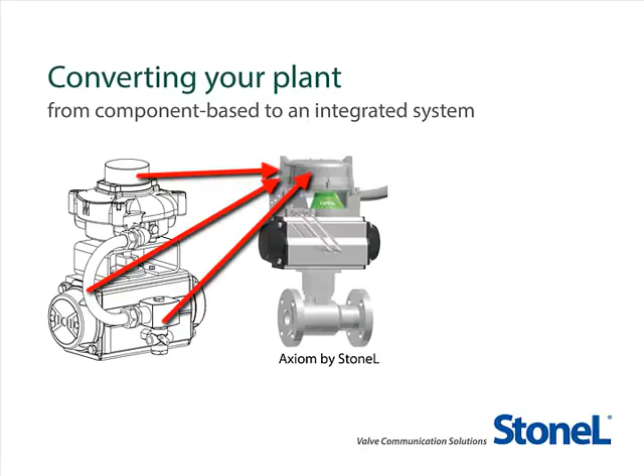By converting your plant's valve monitoring and control accessories from a component-based system to the integrated system of the StoneL Axiom platform, you will improve reliability, increase uptime, enhance safety, and reduce total lifecycle costs in your process environment.

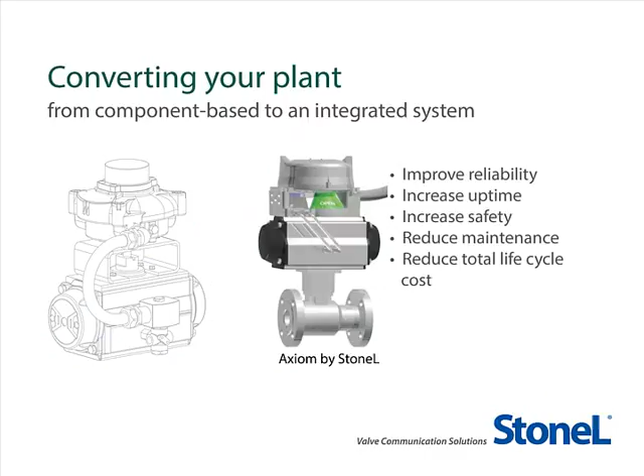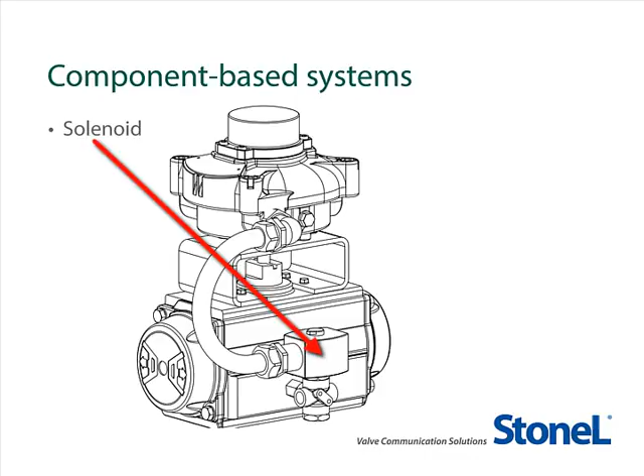During this presentation, we will review the individual parts of a component-based system you may already have in your plant, including solenoids, wiring conduit, and valve monitors with mounting.

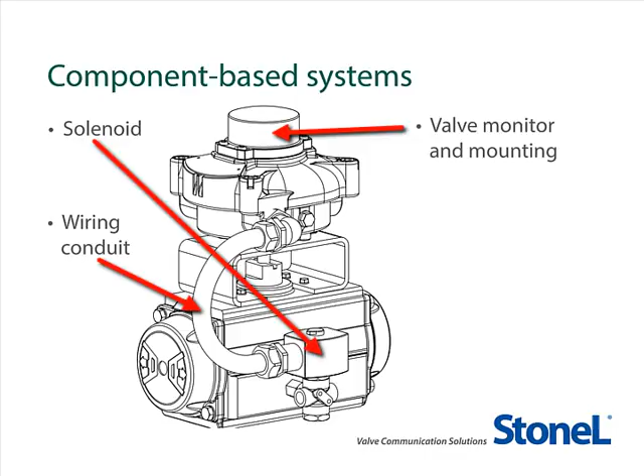We'll compare the cost of a component-based system like this one to the Axiom from StoneL. We'll review the extraordinary capabilities of the Axiom platform and the numerous benefits of converting your plant.

Let's get started. Many manufacturing plants today have fairly complicated component-based valve monitoring and control systems that may include several of the following solenoid variations.

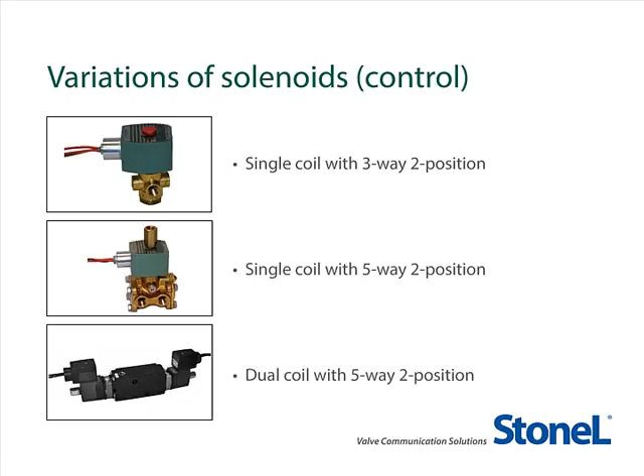Single coil with three-way two-position for single-acting spring return actuators in fail-safe applications, single coil with five-way two-position for double-acting actuators, or dual coil with five-way two-position for double-acting actuators designed for fail-in-last position.

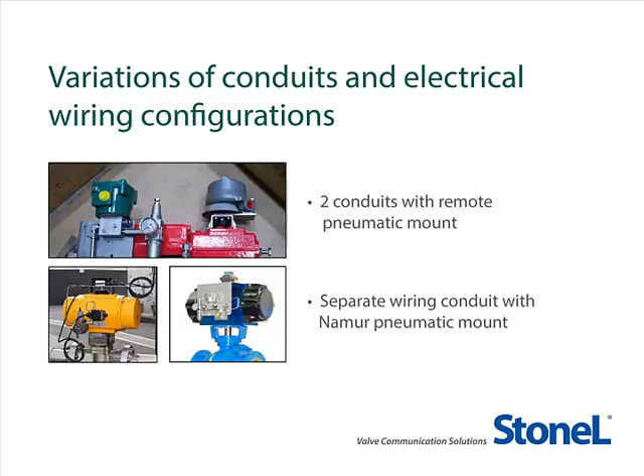You may have an array of conduits and electrical wiring configurations connecting various components on the automated valve assemblies in your plant. You may have variations in switching feedback, including silver or gold mechanical, high or low power reed switches, or different types of solid-state sensors.

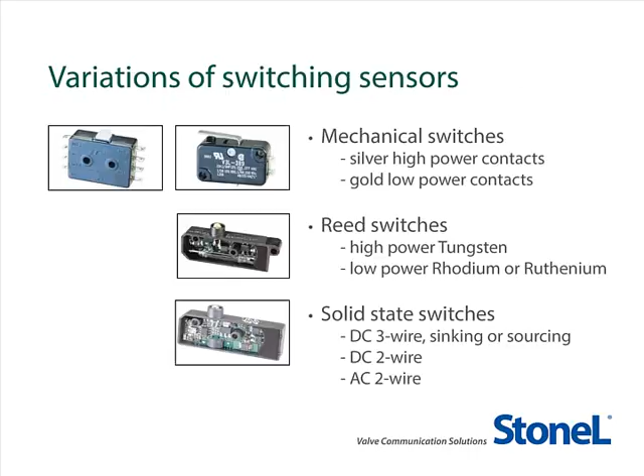Though your component-based system may have operated acceptably, it was more complex to specify and order and much more difficult to install than a single, integrated system using the Axiom.

The Axiom is a much simpler, convenient, space-efficient, and reliable solution for your hazardous process areas and will continue to outperform a component-based system for many years to come.

With an impressive array of capabilities built in, the Axiom offers exceptional reliability and advanced performance, including an integral pneumatic valve with a universal voltage, burnout-proof solenoid, an external pneumatic valve override, a standard five-way two-position valve configurable for spring return or double acting, and a built-in rebreather function.

It also features a solid-state sensor module with push-button set points, fully sealed electronic components, a high-accuracy position sensor system, and a non-moving part magnetic drive system.

The Axiom's pneumatic control consists of a low-power pilot that drives the main high-flow spool valve. It is designed for long life, over 1 million cycles, and has high tolerance to airline contaminants.

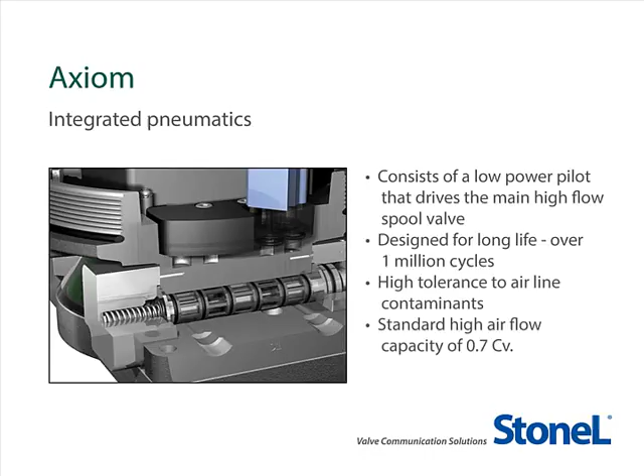It is offered as standard with a 0.7 CV airflow capacity, which is capable of operating most actuators in less than 2 seconds. It is also available with an option of 1.2 CV for larger actuators.

The Axiom also features a five-way two-position spring return configuration as standard, so the same unit is capable of operating both double-acting and spring return actuators.

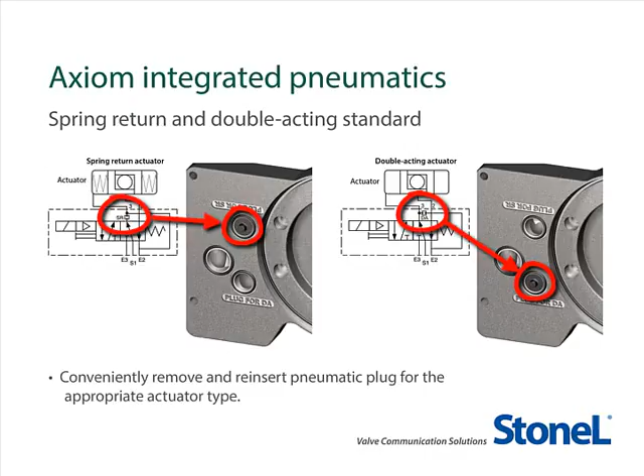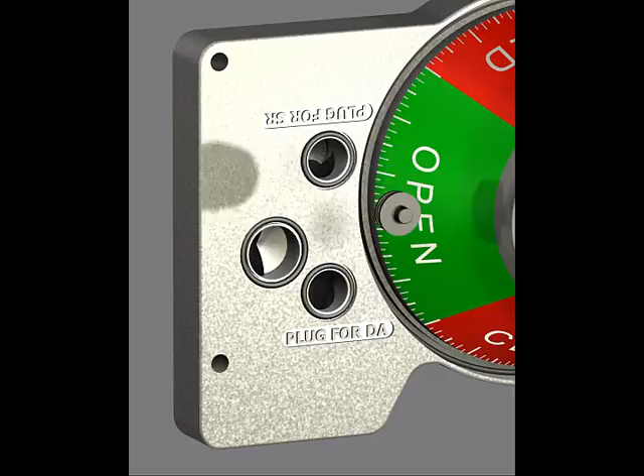Adjusting the Axiom for spring return and double-acting operation is quick and easy. Simply insert the plug sandwiched between the manifold and housing in the DA port for double-acting or SR port for spring return. Reassemble the unit to the manifold and you're ready to operate.

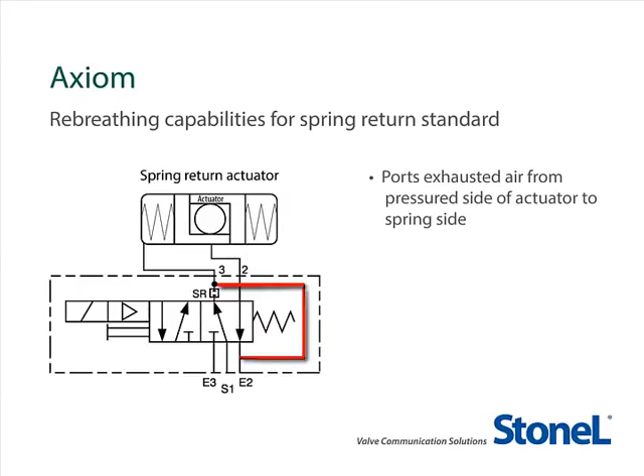With the Axiom set for spring return and both sides of the actuator plumbed, it operates with a rebreather capability. Exhausted air from the pressure side of the actuator will be drawn into the spring side, preventing ingestion of contaminants from the outside environment, which could potentially corrode the springs or internal components of the actuator.

The Axiom utilizes a magnetic drive system which monitors exact valve position and is tolerant of lateral and vertical shaft movements that can result from worn actuators in high-cycle applications. No cams, shafts, or other mechanical apparatus are required that are prone to wear and binding.

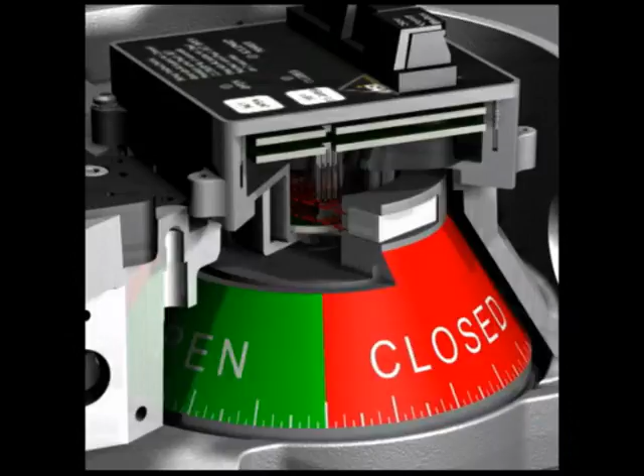As the visual indicator turns, the flux lines rotate with the MagRes sensor measuring the angle of rotation. The result is trouble-free performance throughout the application lifetime.

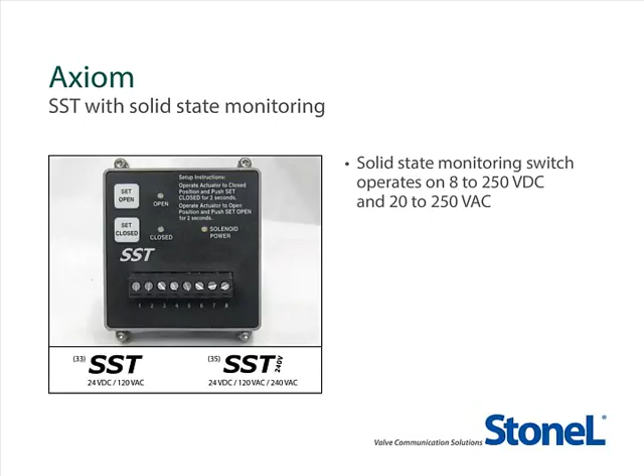The Axiom with SST switches is capable of operating from 20 to 250 volts AC and 8 to 250 volts DC monitoring circuits. The solenoid input on the same module is also capable of operating from 20 to 60 volts DC and from 20 to 250 volts AC.

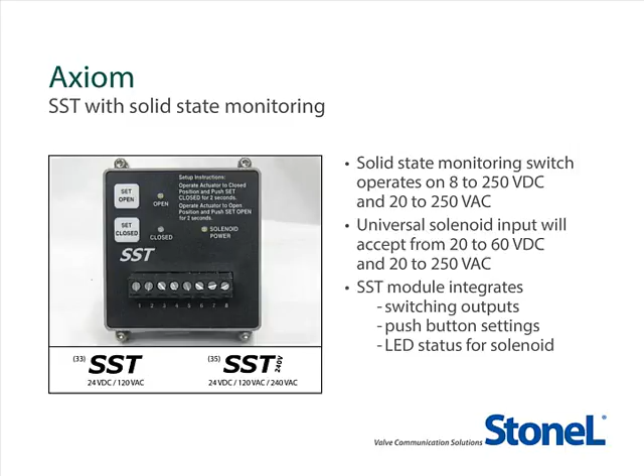And the SST module integrates these solid-state switches and solenoid voltage conditioning, all with LED indication, open and closed push-button settings, and a high-accuracy magnetic sensor system.

You can have spring return or double-acting actuators. You can have AC or DC monitoring applications. You can have AC or DC outputs driving the solenoid valve, and you can have hazardous corrosive environments, all compatible with the same AX model.

By stocking just one model in your plant, you will be able to satisfy a number of different applications.

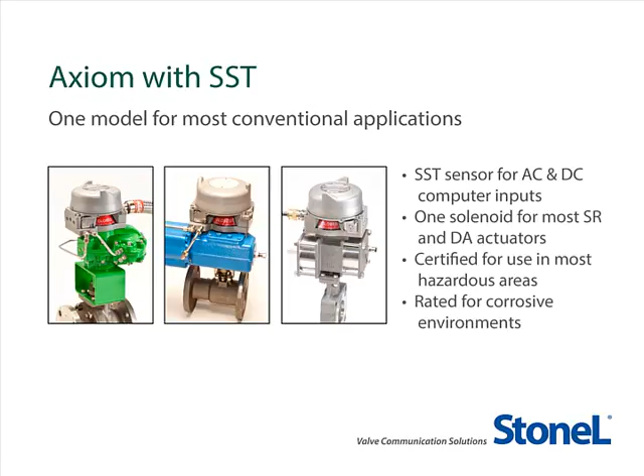The Axiom Sensing and Communication Module, which we call the C module for continuous sensing, is available for either computer input switching or can be selected with Namur sensors for use with repeater barriers in intrinsically safe applications.

A wide variety of communication protocols may also be selected, including AS interface, DeviceNet, Foundation Field Bus, Modbus, HART, and more. With each of the protocols, you may select the solenoid to minimize power requirements and make sure your field network operates optimally.

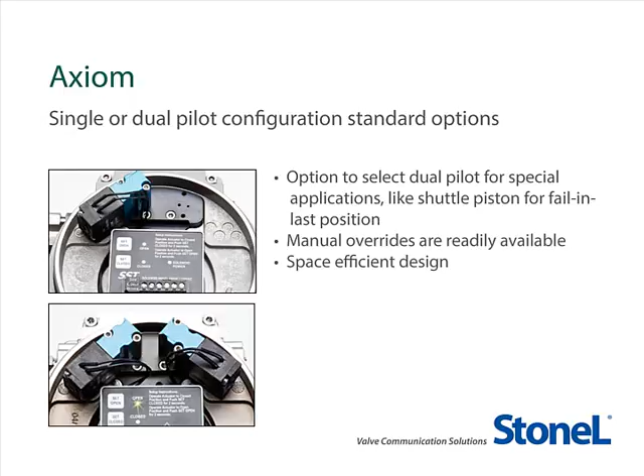With the Axiom, you have the option to select dual pilots for special applications, such as shuttle piston for fail in last position. The manual override on the cap of the pilot valve is standard on all units, and you may specify either an external momentary or a latching override. Since both pilots are neatly tucked into the existing enclosure without modification, there is no change in the already space-efficient design.

Installation and maintenance of the Axiom is quick and easy. The AX encloses all electrical components in a hazardous-rated enclosure with less than 5 inches, 130 millimeters of clearance required above the top of the actuator. Additional clearance for cover removal is less than 2 inches, or 50 millimeters, because there is no shaft to lift over. The automated valve spacing envelope is minimized without compromising performance or maintainability.

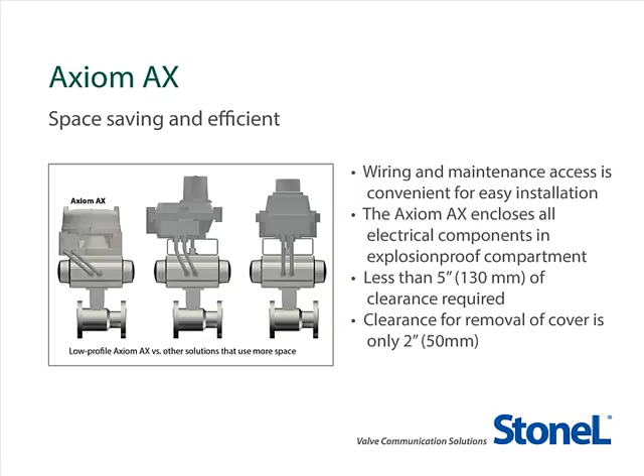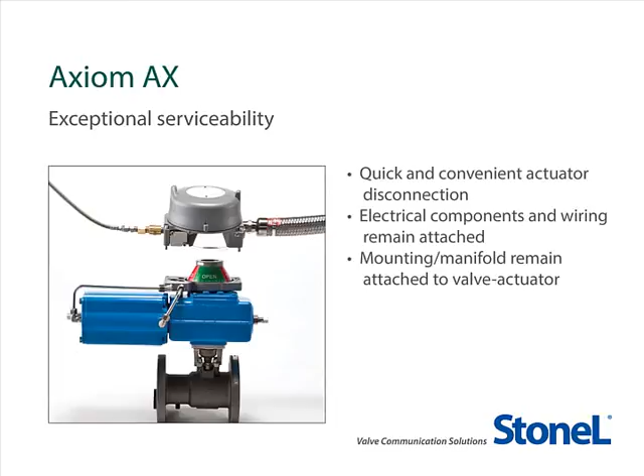The AX offers exceptional servicing with a quick actuator disconnection while leaving the electrical components and wiring connected and the manifold attached to the valve. With the AX, you may simply turn off the air supply and remove the unit from the mounting pad. The tubing, O-ring seals, and visual indicator coupler are captured onto the valve actuator, so you can simply remove the actuator and valve from the pipeline without de-energizing the circuits and unwiring the unit.

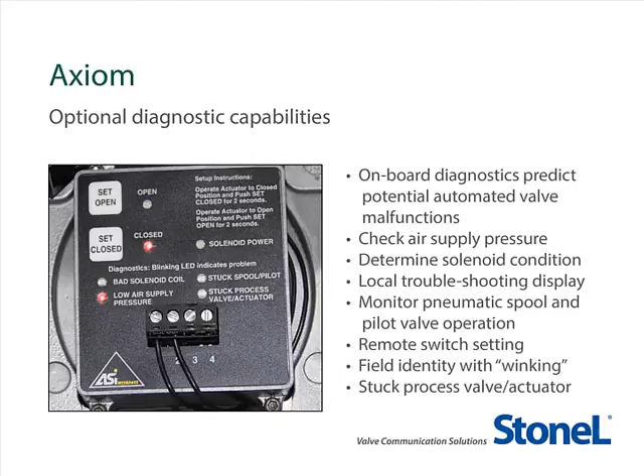You can reduce troubleshooting time and identify potential problems by selecting an Axiom platform with diagnostic options including supply air pressure levels, solenoid and spool condition, and process valve actuator status. You can also remotely set the switches and use a winking feature to identify the unit in the field. The special LED display provides local indication with remote information transmitted back via the AS interface or HART communication protocols.

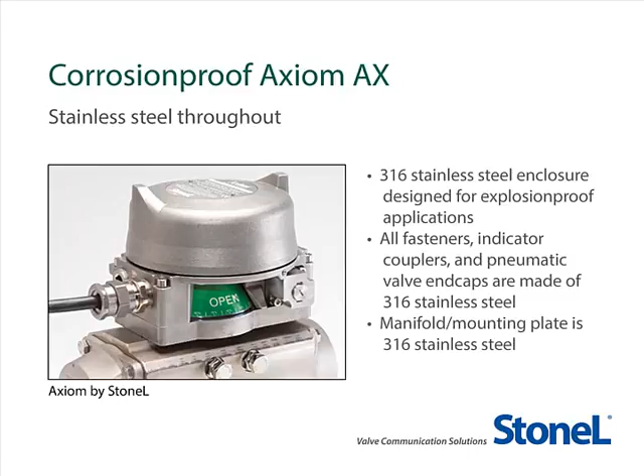When your application calls for extremely corrosion-proof components, the stainless steel Axiom AX is the best choice. This platform is well suited for use in corrosive, heavy washdown, and high seas environments. The enclosure, manifold, fasteners, couplers, and pneumatic valve end caps are made of 316 stainless steel. Even the pneumatic spool comes standard as 316 stainless steel in this model.

The impressive 5-year warranty on the Axiom AX makes it an even more value-loaded product. The warranty covers all mechanical and electrical components. This kind of 5-year comprehensive warranty is unprecedented in our industry.

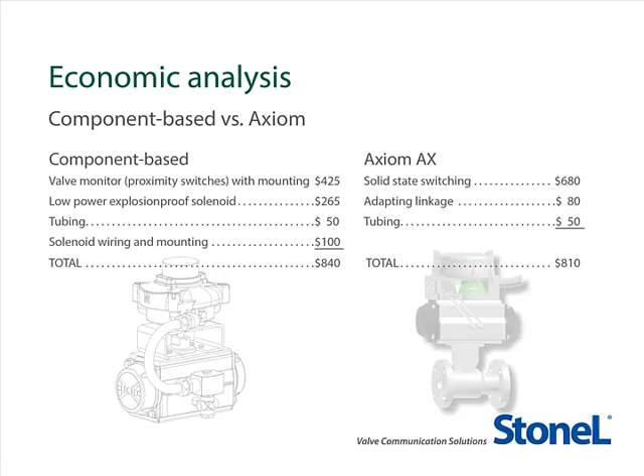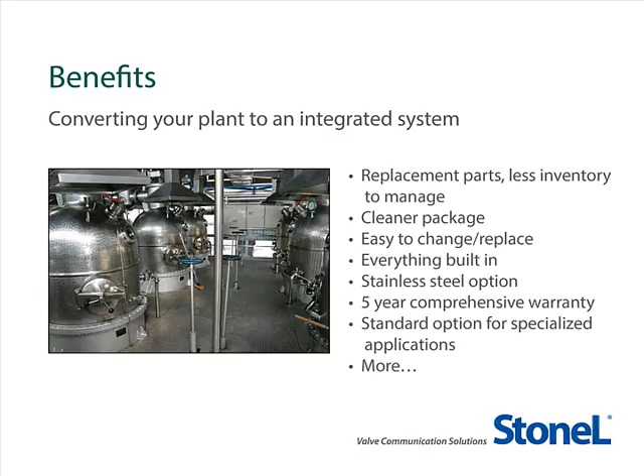Now that we've covered the economics of converting your plant to the Axiom platform, let's talk about some of the other benefits. Converting your plant to Axiom will mean less replacement parts to inventory and manage, and a cleaner, simpler package that is easy to change or replace because everything is built in. The AX platform covers explosion-proof Class 1 Div 1 applications, including hydrogen. It offers a 5-year comprehensive warranty and much more.

Thank you for taking the time to learn about converting your plant from a component-based system to our Axiom platform. We believe this is an exciting opportunity that will create money-saving value and contribute to your plant's success.